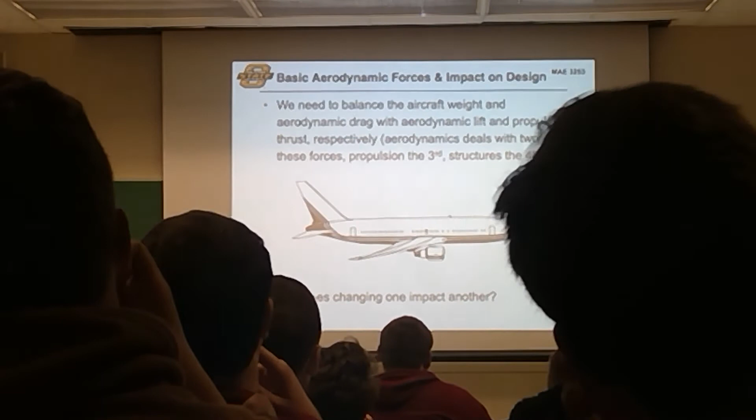Okay, well here's the problem with this. First off, what do we know about basic aircraft courses? Most of the time when we look at the performance of our aircraft, we're doing what we call steady state performance, where the aircraft is flying at a constant velocity and constant altitude.

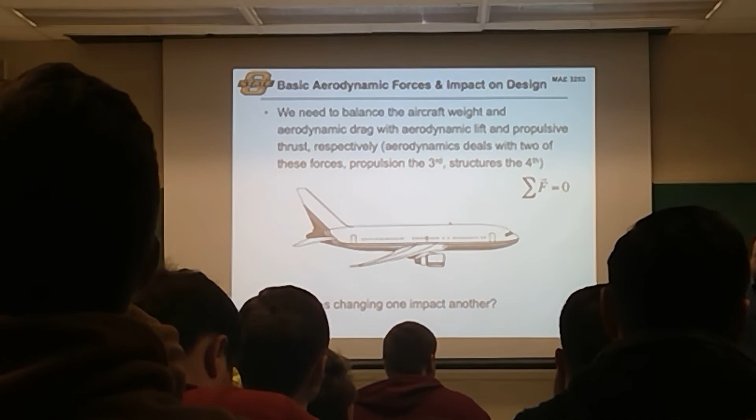So in that configuration, what do we know about the forces? They're equal. It's not accelerating, not getting faster or slower, not climbing or descending. It's steady state, so the sum of forces has to equal zero. That means our four forces on the aircraft - lift, weight, thrust, drag - all have to be balanced. Lift has to equal weight, thrust has to equal drag.

Now here's where the problems start to come in - things like the aerodynamics, which is one of the more challenging things from a scientific standpoint to predict. That's really hard to do. And we can't just go back to those computers and say, here, spit out the optimum design, because it's really difficult. I worked with the lead technical fellow of Boeing, and using computational fluid dynamics, they estimate that the current growth rate of computer power - which still follows Moore's law, doubling in capacity every 18 months - means they will not be able to do a full aircraft simulation until 2085.

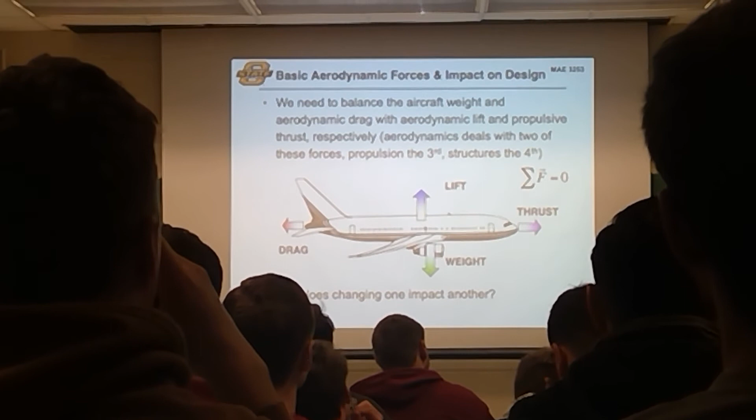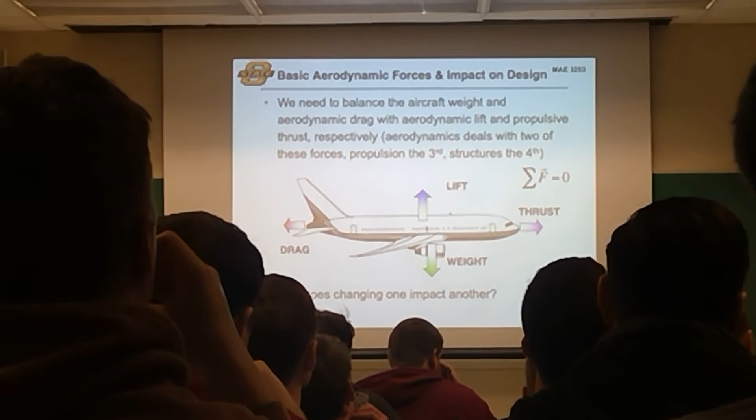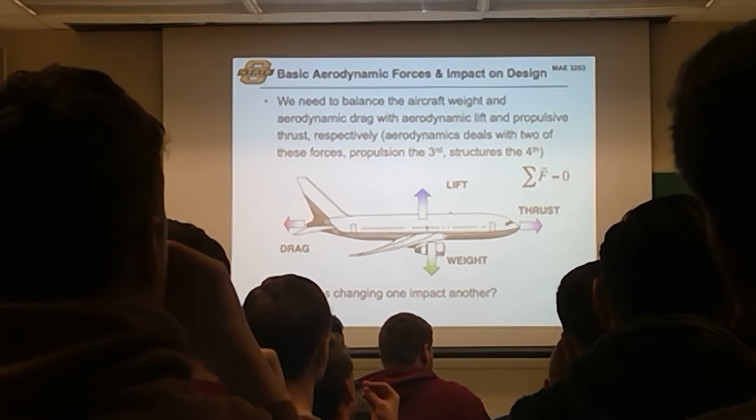Why is that? Because you always want to try to minimize weight - you want your aircraft to be light. We're not building a bridge where you can just throw some extra concrete in to make it stronger. We have to make it optimal. We're designing to make sure the aircraft isn't going to fall apart, but just that - we don't want to put any extra weight in, because that's going to impact our efficiency. That's one of the areas where we have the biggest problem.

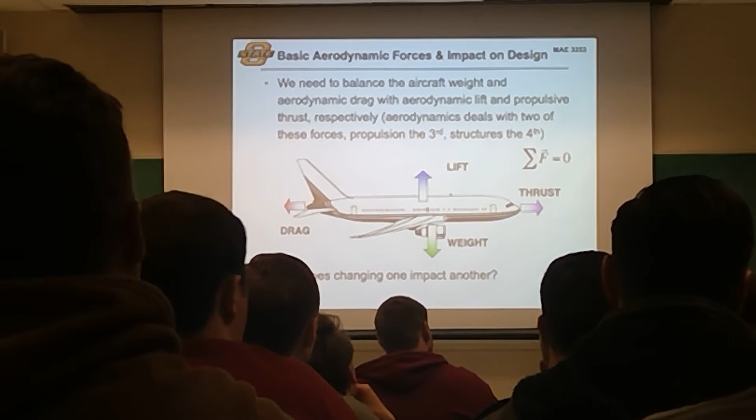Now instead of blaming the aircraft designers, let's throw this back on the engine company. Let's pick on Rolls-Royce. Your aircraft manufacturer is contracted with Rolls-Royce, who are supposed to provide a new engine with a certain level of power, thrust, and specific fuel consumption for a given event. They haven't built this engine yet - it's brand new. They have to figure out how to integrate it and do everything they need to do. And it comes in heavy.

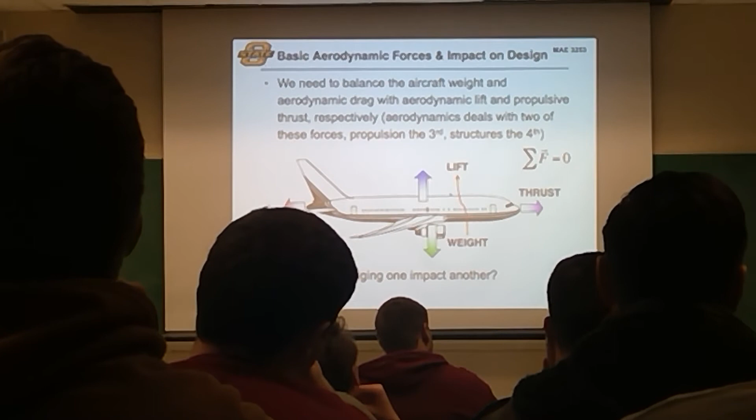What does that mean? What do you have to do with everything else? If our weight ends up increasing, what else has to increase? Our lift has to get bigger. Now if lift gets bigger, what else gets bigger? Drag - the relationship is higher. If we're generating more lift force with a 3D aircraft, our induced drag is going to get larger.

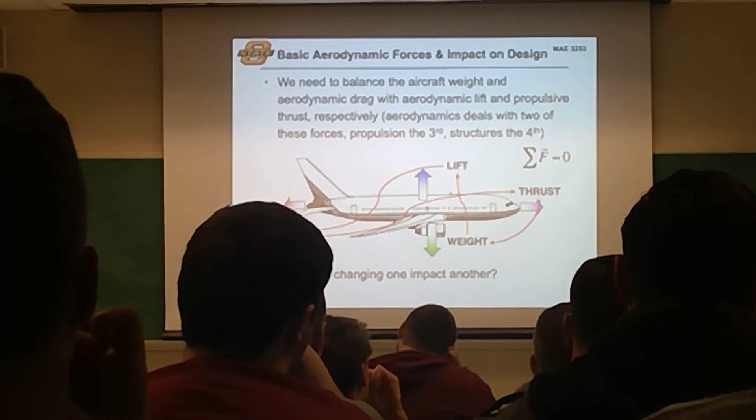If we just said, hey, our engine's 10% overweight, no biggie, we'll just make our wings a little bit bigger to compensate - guess what, you carry more drag. Carry more drag, what else do you have to increase? Thrust. Now to get more thrust, what do you need? A bigger engine. And so this ends up really quickly becoming what we call a death spiral, where you end up with an aircraft that needs infinite lift.

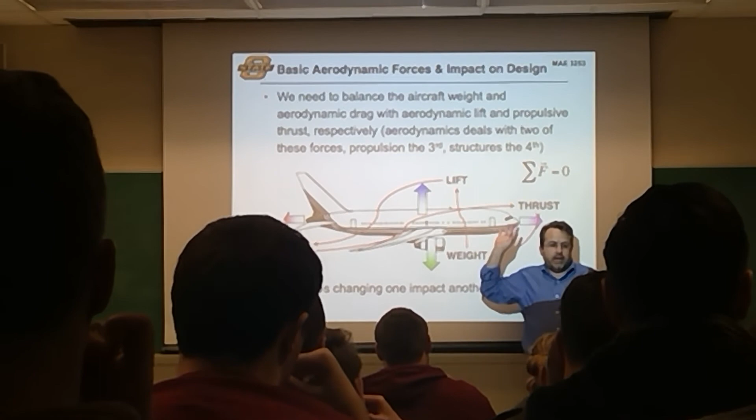And that means you crumple up your paper, you throw it away, and you start from scratch. This is an extremely common problem.

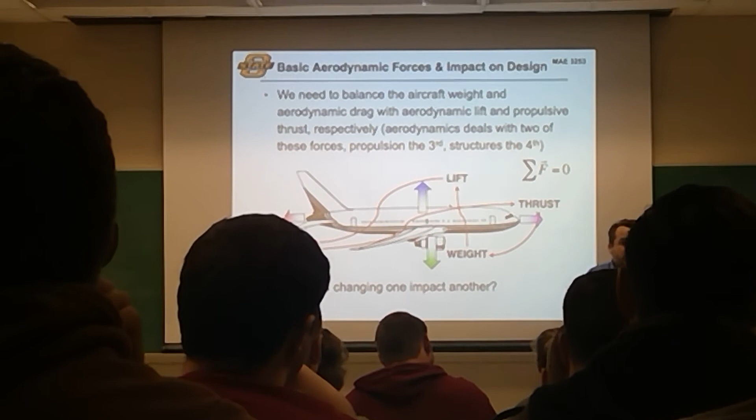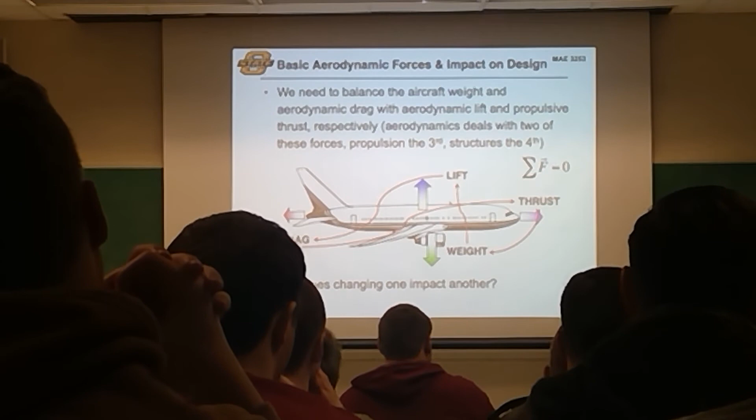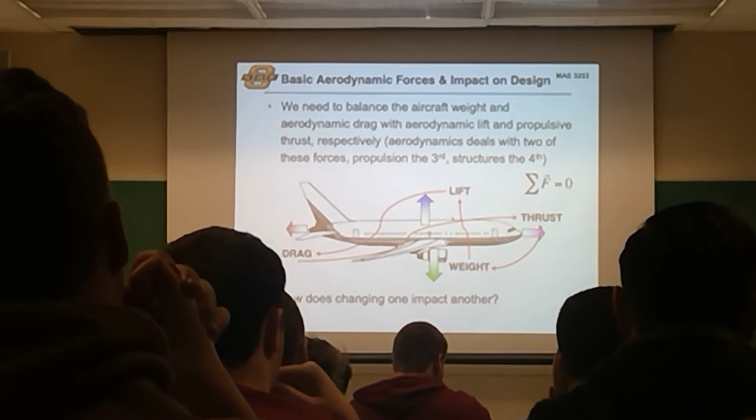Boeing, for example, has been designing aircraft for 100 years, and they did this with the 787. They ended up being heavier than they anticipated. They know what they're doing, but it's a difficult problem. Why? Because they're trying to reduce the weight of the aircraft by using composite materials. There's a lot we don't know about composite materials. We built the process and ended up slightly overweight.

That means we have to fix things, kind of when you don't want to do it, closer to the end of that design cycle. We don't want to do that.

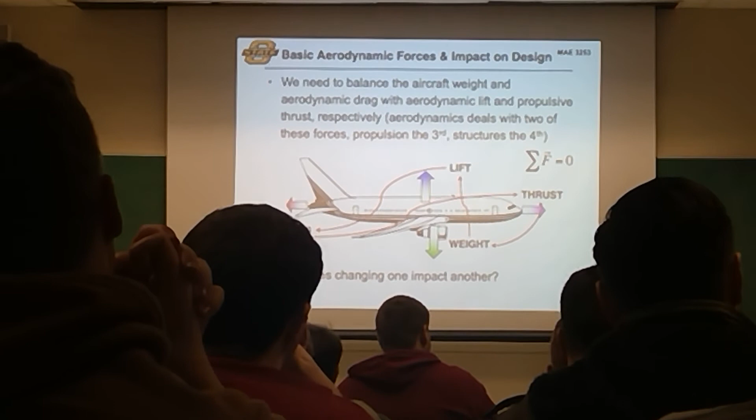Now, one of the ways we help combat this problem is we specialize. So we have folks working on the propulsion side, for example, who when they think about an aircraft, they think it should look like that. We have folks over in aerodynamics who say, no, I just want to focus on the best lift to drag ratio possible. And we have folks over here thinking about what the people on the ground should be doing.

We're going to spend most of our time thinking about the overall design, but this aircraft has to be serviced. A lot of the things we do from the aircraft design perspective, when you look at an aircraft and say, oh, why is it done this way, more often than not you can probably say it's because someone needs to be able to turn a wrench. So not only do we have to design it so it's manufacturable, it also has to be serviceable.

So you have all these specialists coming in, working on their piece, really having tunnel vision, but then they have to come together and spread everything out, be able to focus on that overall route. This is what we call the systems engineering approach. We have all these different systems we want to optimize.

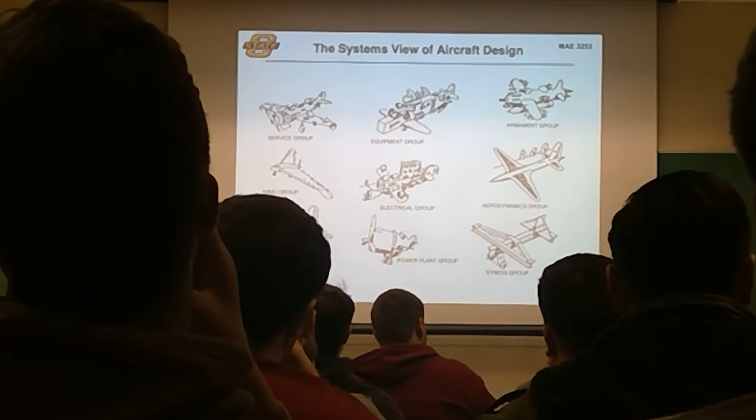Now, how many of you have taken the survey in here? The Survey Monkey survey. I want you to come through and do this so we can come back and talk about the results. This is really to get your perspective both before the class and then after the class, so we can see where we're at.

So what's most important? We're going to use this phrase a lot. The default answer, if I ask something and you don't know the answer, this is what you're supposed to say: it depends. Which basically means you need more information to go through it. We're going to use this a lot when we talk about things and say, well, which way should we go? We have design A, we have design B. What are we going to focus on? Aerodynamics or structures? Propulsion or control?

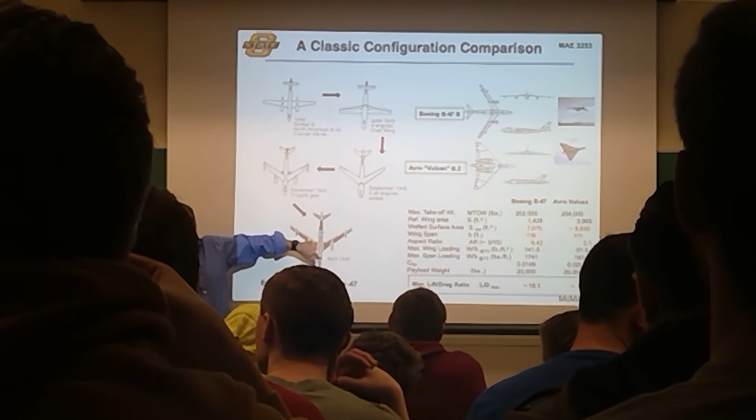Now if you look at the Avro Vulcan, it's a completely different design aircraft. We have this, which we can consider the traditional tube and wing - a fancy name for a tube with a wing attached to it. And then we have this flying wing design, which from an aerodynamicist's perspective looks sexy. This is more utilitarian.

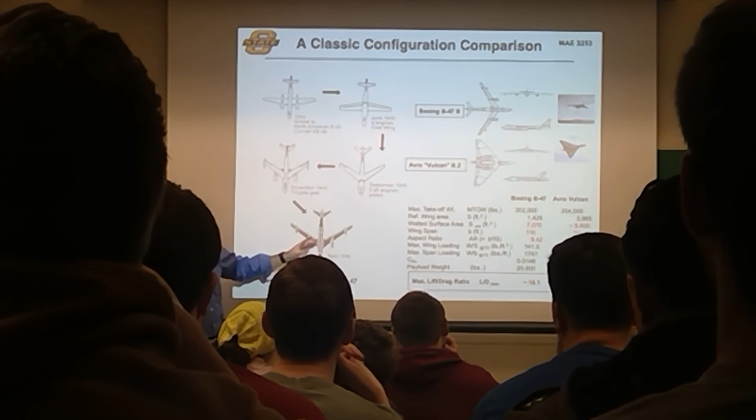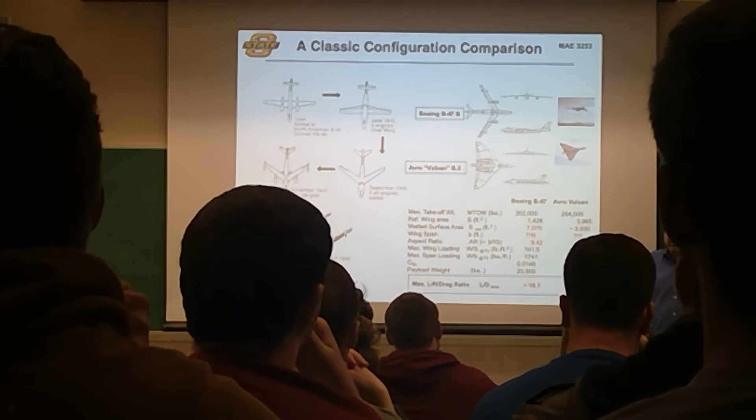So you can look at, for example, the max takeoff weight - within 2,000 pounds in terms of their mission. Their wing areas, however, are very different, so very different aerodynamics from one aircraft to the other. Payload weights also similar, but drag ratios different for both. So you can look at these and say, well, which one is a better aircraft? The answer is: it depends. Depends what you're looking for in those two aircraft.

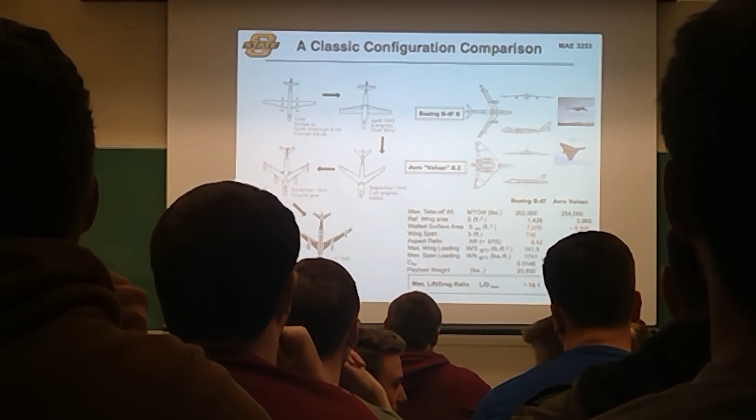One of the issues with the B-47 was its takeoff distance, so they usually had to augment its capabilities by having things like rocket-assisted takeoff systems in order to get it off the ground. That was the norm in those days, when we didn't worry so much about it. The Avro Vulcan was flying up until about 2 years ago when they retired the last one - these being pretty sexy aircraft.

Now, in the end of the whole scheme of things, which design won? You come back and look at the B-47 here, and compare that with configurations for the Boeing 707, which is the foundation for the modern airliner, and a more modern version like the Airbus A340. You can see, wow, those all look pretty similar. So you can say, hey, they probably got 90% of the stuff right in terms of optimizing the aircraft design with that basic B-47 configuration.

This is why we can go back and use this as a good starting point to say, hey, if I'm designing this aircraft, do I need to start from scratch? No, I could start with one of these points here, just like they did. They started with a modern aircraft design, modern for them, and then evolved it from there to meet the new mission requirements.

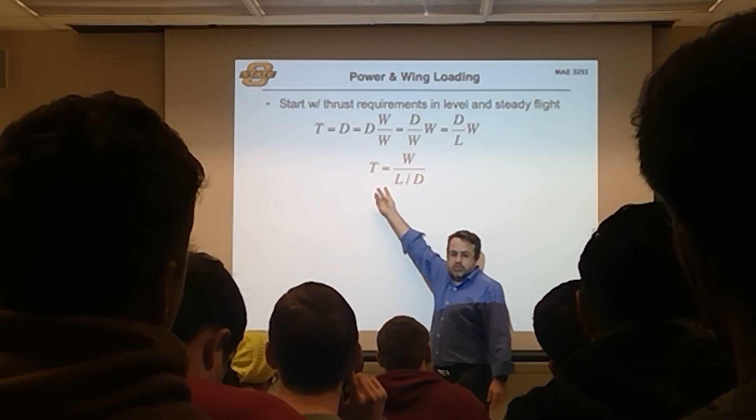Then we take that drag side and multiply it by weight over weight, because that's equal to 1. In level steady flight, lift has to equal weight, so we replace one of those weights with lift, and rearrange to get: thrust equals weight divided by the lift-to-drag ratio. This is exactly the same thing as thrust equals drag—we just used algebraic trickery to get there.

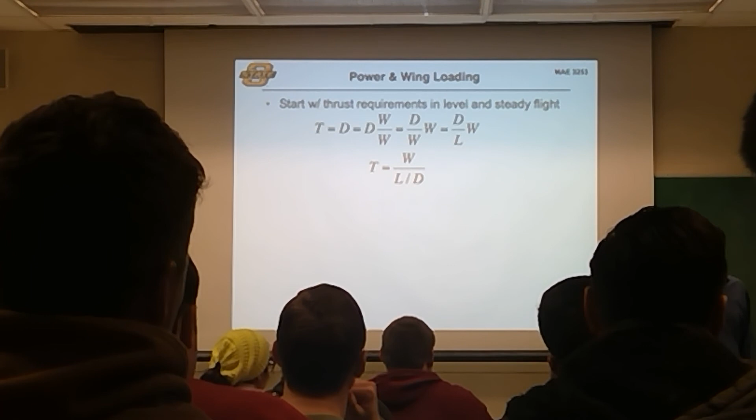That's the simplest equation we'll have this semester, but it's also really, really powerful. If you want to know how big your engine needs to be, tell me two things: how heavy your aircraft is, and what's your lift-to-drag ratio. Now, those two things are really hard to predict—that's where your challenge starts to come into play.

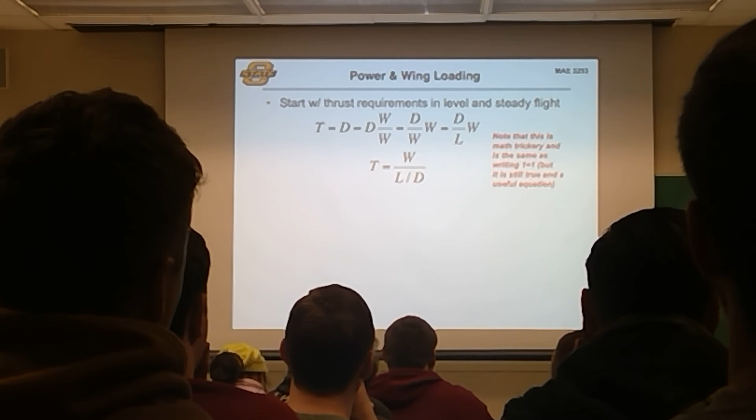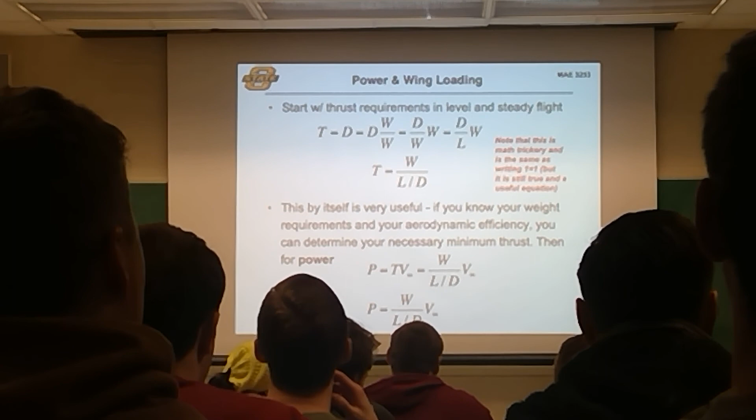Then you throw on top of that, how fast you want to fly—so all you have to do is multiply that by velocity, and now you know the power output, or the power required. Put all that together: you figure out the thrust, you figure out the power for your cruise velocity, and that tells you a lot. That's a really good starting point for your aircraft.

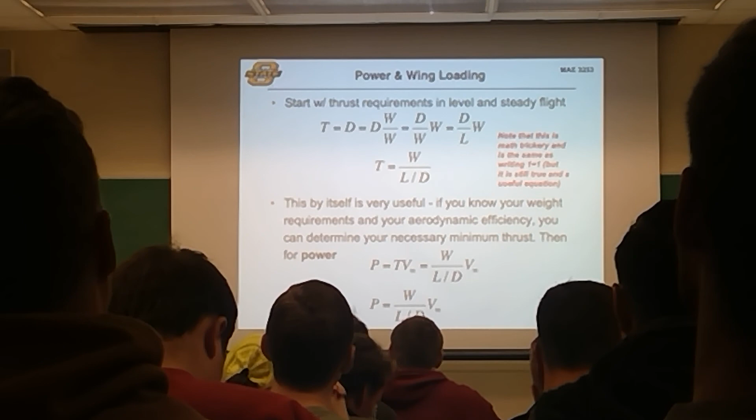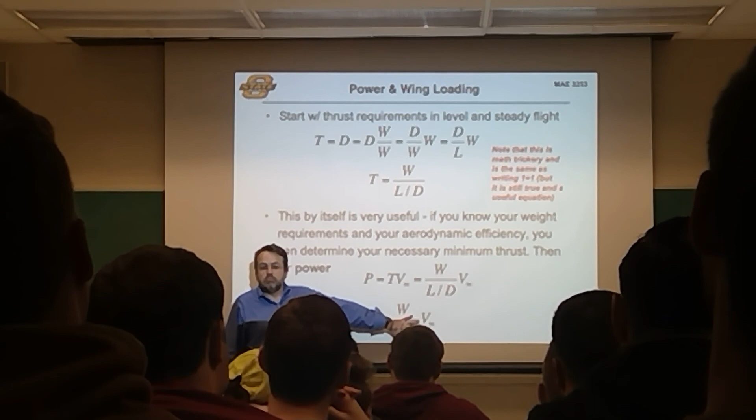So some of the things you want to do in your benchmarking: how heavy are other aircraft that fulfill similar missions to the aircraft you're designing? What's their lift-drag ratio? How fast do they fly? What type of engines do they use? You can put all this together with a really simple equation to start getting ideas about what that design should be.